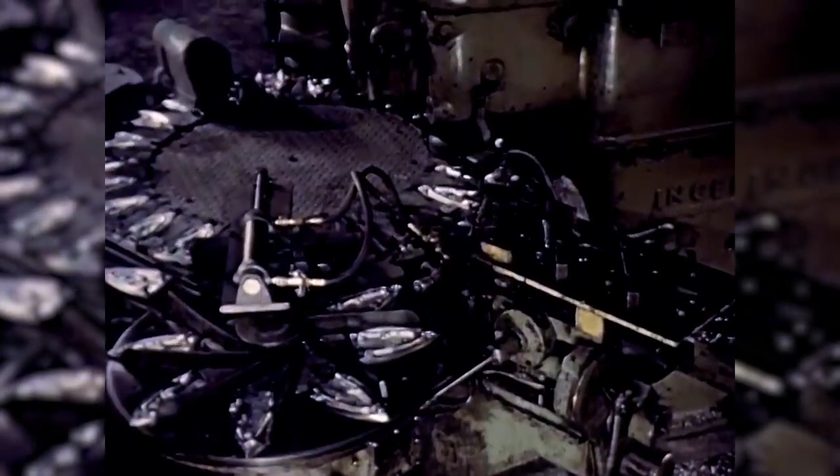This is automation, today's way of manufacturing. This is the challenge for today: to meet competition and rising costs by moving step by step towards automation.

Continuous automatic production, including automatic handling, automatic making, automatic inspecting, automatic assembling, automatic testing, automatic packaging of products in one continuous flow. The evolutionary step-by-step development is well underway today.

Before the word automation was coined, the idea of fully automatic production suggested blue sky fantasy. Improvements in manufacturing seemed funny or fearful, depending on the viewpoint. And increased productivity, the source of higher wages and profits, was often overlooked. The trouble was that some people thought of automation as a sudden thing, a revolutionary idea.

But it isn't. It began nearly 200 years ago, when Oliver Evans put into operation an automatic grist mill. But Evans' basic problem was controlled power. He had to depend on water wheels and gravity. Before automation could become significant, some entirely new type of power would have to be developed, a power far more flexible than falling water, or even steam.

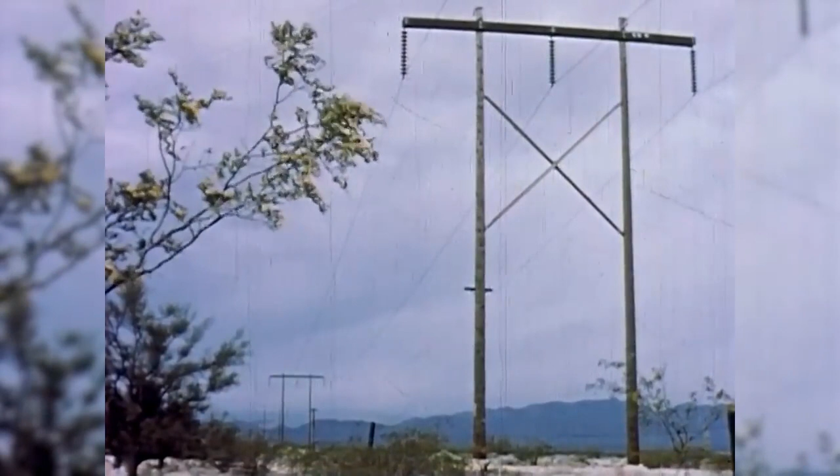Controllable electric power, which could make automatic production practicable throughout industry, appeared in the 19th century. The step-by-step development of continuous automatic production was accelerated as early as 1919, when automatic blowing of electric lamp bulbs was begun at Pitney Glass Works in Cleveland.

In 1938, five automatic machines were connected with transfers to form a continuous production line for machining and polishing flat iron castings. The idea of continuous automatic production, of automation, was here progressing from the processing of flowable materials like grain and molten glass to separate items like flat irons.

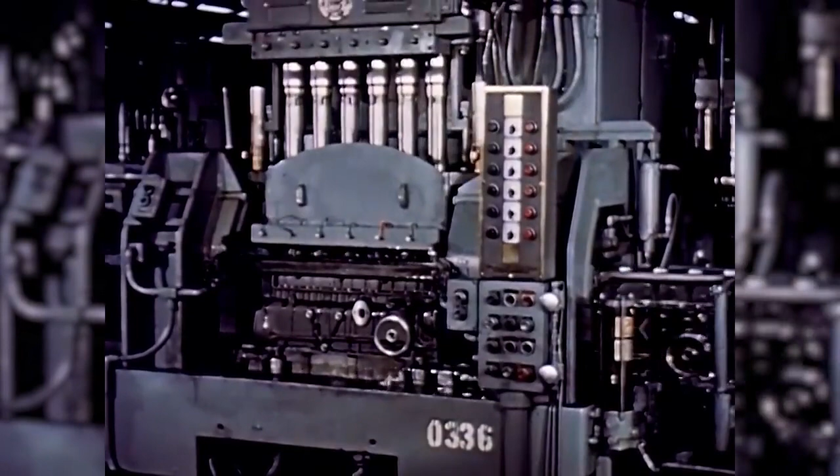And then, in the late 40s, developments in electric power and control helped to make possible a line for the automatic machining, honing, drilling, and boring of automobile engine blocks. This greatly increased productivity worked to the advantage of everyone, for this company today employs many more thousands of people than it did in 1947.

This natural evolution in industry is developing automation as a way of manufacturing that can do much to improve our factories, products, and profits, and upgrade our workforce today and in the years just ahead.

Progress in automation comes at a time when we will need it most. The United States, once an essentially agricultural country, has become the world's most important plant for the production of goods, with plenty of room left for food and fiber crops.

Each person works for the other. All consume each other's goods and products. Our numbers are growing fast, but our demand for goods is growing much faster. At the same time, business is getting more and more competitive, for if demand is growing, so is supply, as new competitors appear or old ones increase their efficiency.

To hold or to build our share of the available market, we must cut production costs by applying the principles of automation.

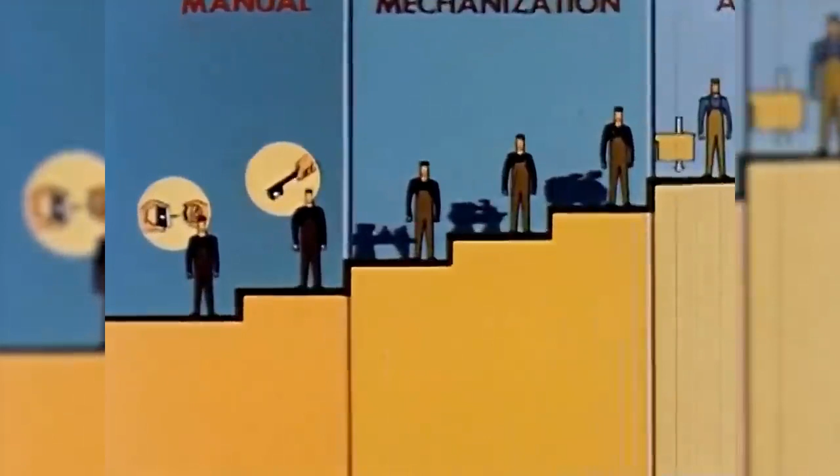Manufacturing operations can be separated into three broad groups. First is the manual area, where physical effort is used to perform operations by hand or with the aid of hand tools. Second is the mechanization area, where manually operated, power-driven machines with varying degrees of control are used to perform one or more operations.

Third is the area of continuous automatic production, where automatic machines are integrated with transfer devices and with controls to perform a series of continuous automatic operations.

Materials handling begins in the manual area as a separate operation. In the next area, mechanization of materials handling is introduced. In the automation area, it is an integrated part of all operations.

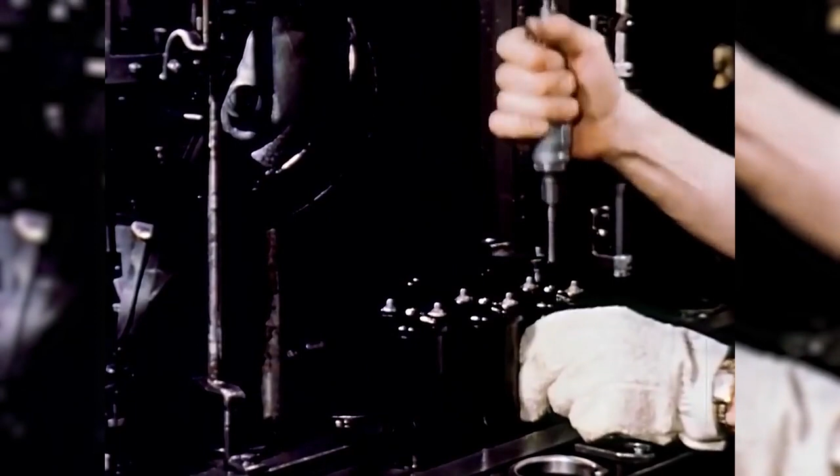How automatic can we get? Except for process industries like oil and chemicals, the highly automated factory is still far in the future for most manufacturers, and progress comes from finding operations that can be upgraded, if only one step at a time.

But the pressure of competition is bringing about step-by-step progress towards continuous automatic production, towards more and better jobs and greater profits. Automation principles, wherever they have been adopted, have proved their value in every way.

First, automation pays for itself within reasonable time. Automation increases efficiency. Machines can be kept running longer at full capacity without shutdowns and delays for loading and unloading.

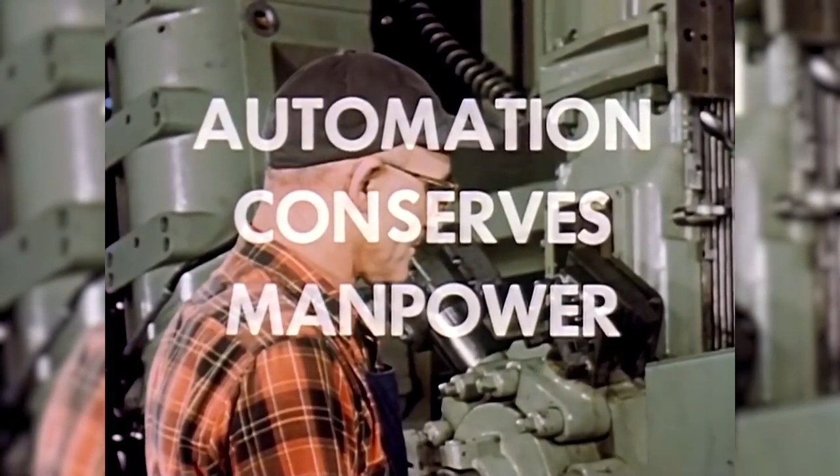Workers are upgraded. The emphasis shifts from manual to mental skills. Automation conserves manpower, a critical requirement as the demand for products grows far faster than the labor force.

Automation improves quality by reducing manual handling, and there is greater opportunity for building inspection into the process. Automation increases safety. Machines move and lift.

Human fatigue is greatly reduced. Automation reduces in-process inventories by the continual movement of materials.

While continuous automatic production has not been entirely achieved, some industries are close to it. Bulb production was once a batch operation, but as early as 1919, development toward continuous flow began.

In this glassworks, 46 types of bulbs are produced. Here is an operation high in the automation area.

Glass biscuits are automatically produced by pocketed rolls turning against flat rolls. Chain conveyors automatically pass the biscuits to the blowhead. Finish blowing takes place in this rotating two-part mold. Around they go by way of a merry-go-round conveyor, continuously, automatically, on their way to the annealing oven.

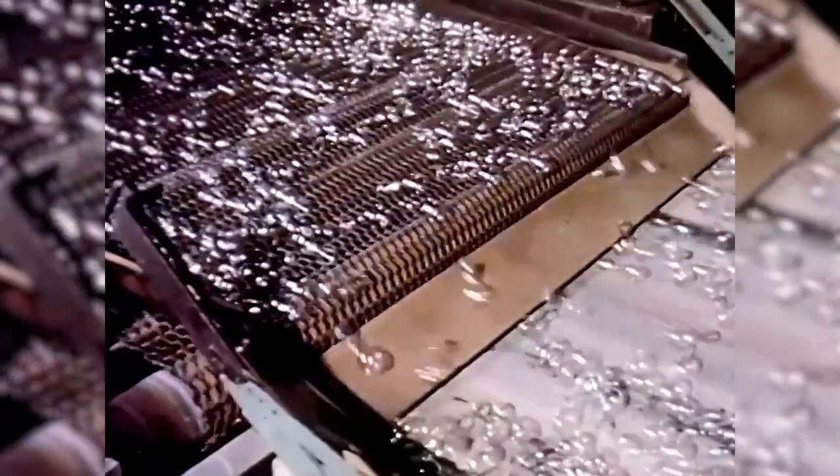The plant capacity through the use of such automation as we have seen is an unbelievable 1,100,000,000 bulbs a year on a 40-hour week basis.

Between 1910 and today, the cost of living index has risen 183%, but the cost of the 100-watt light bulb fell from $1.45 to less than a quarter.

If the production methods of 1910 were used today, this 100-watt light bulb would cost over $4.

During the same period, the population of the United States increased 80%, while employment in the lamp industry went up over 400%, or 5 times as fast.

Here is the product of an automation process that has very wide appeal indeed. Cookies of various types produced in a continuous flow operation. The coordination of equipment speeds in this process from dough to packing is provided by adjustable speed DC motor drives.

A cookie is more than something to eat. It is a manufacturing problem that has been licked. The customer is king, and highly flexible equipment is required to give him these varied delicacies.

This machine can be set for many different varieties, from rotary molded cookies to extruded stock, like fig bars, which are cut after they have left the oven.

Since all 4 types may be run in one day, the drives must change speed proportionately. Baking time can be changed, so the requirements for the next run can be met without upsetting relative adjustments on cooler, stacker, and packer for the remainder of the run.

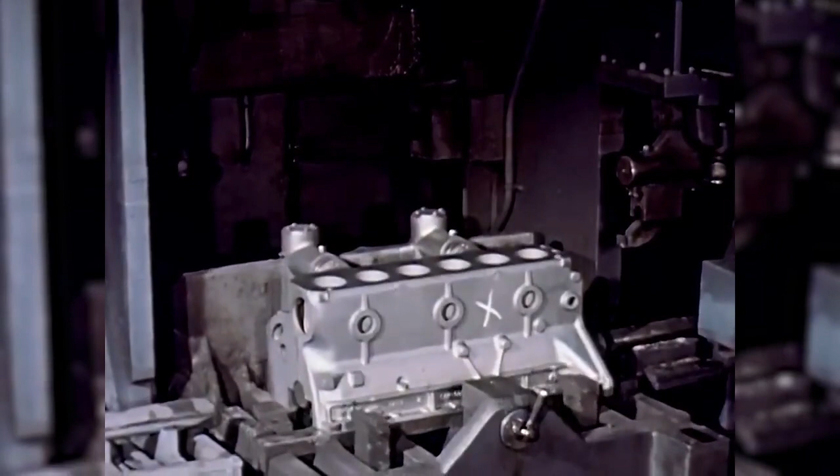Production levels are maintained by specialists who replace all worn tools. In this operation, electric drives and controls contribute to higher production rates at lower production costs.

These more elaborate examples of automation demonstrate to what extent the idea of continuous automatic production has been put into practice. It may not be economically feasible for every manufacturer to automate his entire production line, but important cost reductions can be realized by automating parts of a total operation.

Few people realize that for all operations, including making, inspecting, assembling, testing, and packaging, the average falls at the low end of the mechanization area.

This is the type of manual operation that can be seen in thousands of plants today.

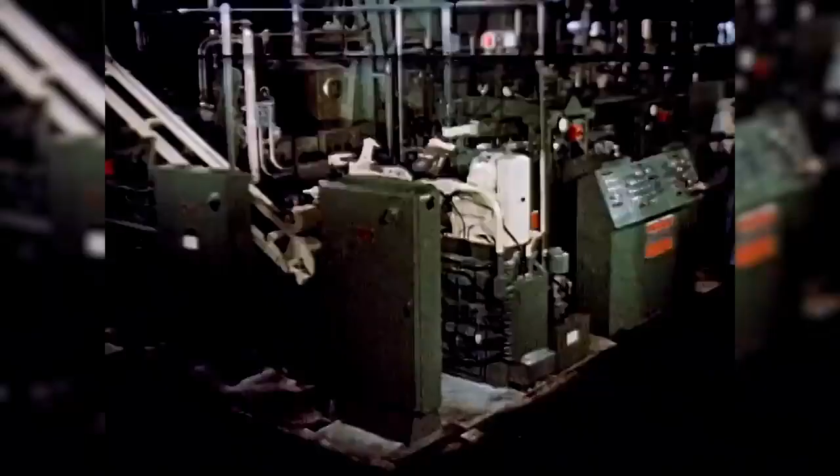The forgings shuttle down a chute into the first machine. From this point on, 22 different types of operations are automatically performed in a continuous cycle.

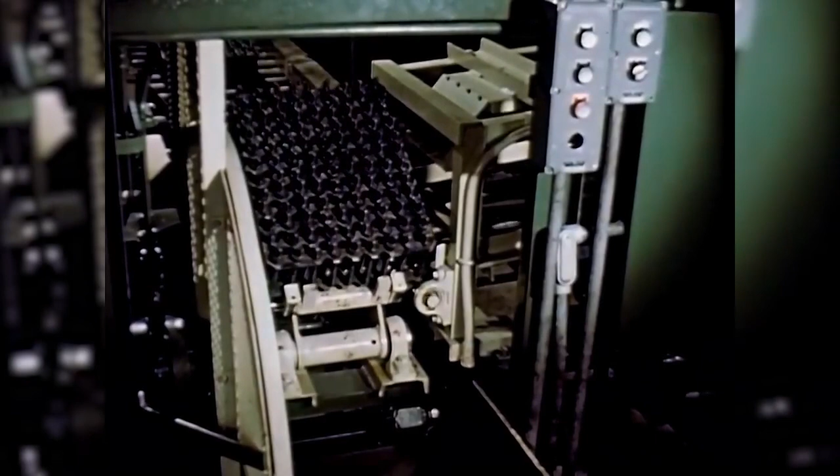Upon completion, the pallets are dumped and returned to the loading station. The crankshafts are then transferred to the final grinding operations, which will result in finished crankshafts like this.

There are numerous opportunities for moving inspection operations into the automation area. This manual inspection operation, once the very symbol of precision, is fast losing appeal as those who practice it lose money. Here is a machine for the automatic gauging and segregating of pistons.

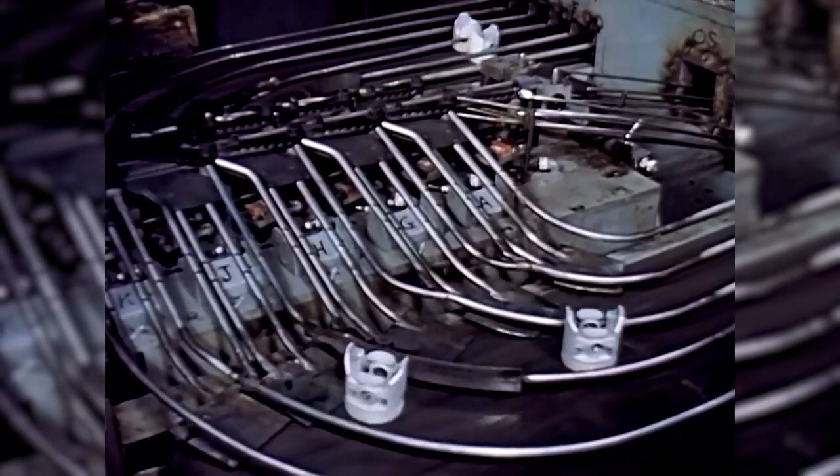The pistons enter and are gauged and stamped for pinhole size. Undersize and oversize parts are rejected down a chute. The second station gauges the piston for skirt diameter and taper, stamps it, and transfers it on a belt conveyor unit for segregating into classifications. Capacity of the machine is 1,700 parts per hour.

At times, automatic inspection may be combined with automatic making in one machine. This machine, equipped with automatic loading and unloading fixtures, continually measures its own work. When an error is sensed in the machining of a part, the tool is automatically repositioned to eliminate the error.

Assembly, even today, is an operation that falls almost entirely in the manual area. But cost-conscious manufacturers in all industries are alert to opportunities for savings through automation. In the assembly of condensers, for example, this winding machine has greatly increased production.

Significant progress has been further accomplished with this ingenious inline machine, on which 4 condenser parts, including cans, tubes, spring washers, and windings, are automatically assembled.

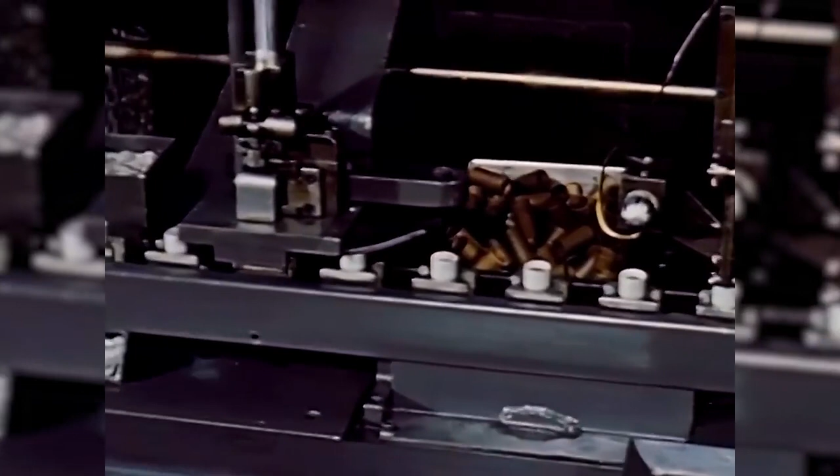In another inline operation combining further assembly and testing, each lead is gripped as the assembly passes, and the condenser is tested for capacity. If this test is unsatisfactory, the assembly is automatically rejected.

Brass clips are attached, as they are made, onto the lead wires. The clips are then automatically welded to the lead wires.

Here, great strides are being made toward the automatic assembly of electric motors. The motor parts are automatically conveyed from different areas of the factory to come together for assembly.

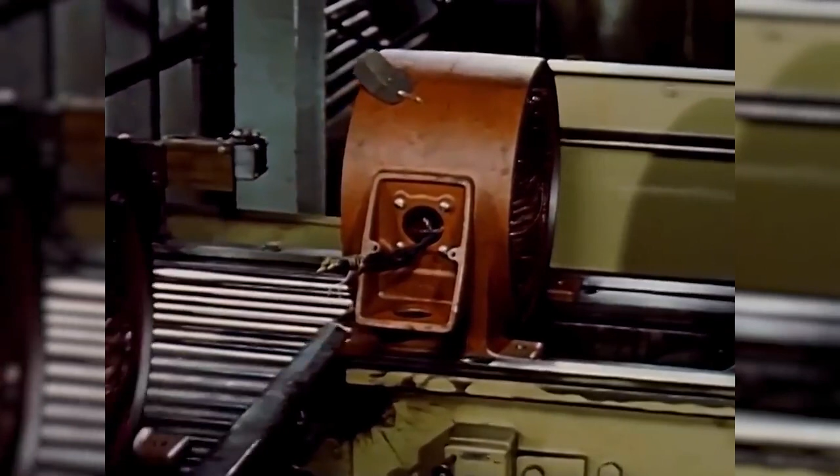The focal point is this assembly machine. The upgrading of the operation for automatic assembly here has helped to double motor production.

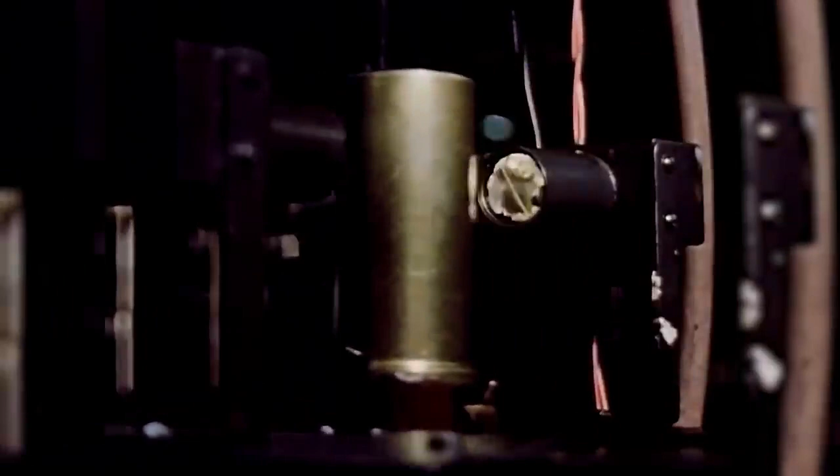The coils moving on the conveyor are checked for presence by a photoelectric cell and pass against sliding contacts for successive electrical tests. Sound signals notify the operator of defective coils, which he removes and places in a reject chute.

The testing of fluorescent starters has been accelerated by this automatic rotary machine. The starters, loaded manually into a rotating conveyor, are actuated by contacts traveling along a circular track.

The starter lights a fluorescent tube within a given period of time, and a photoelectric cell detecting the light allows the starter to be passed. An unlighted tube calls for rejection.

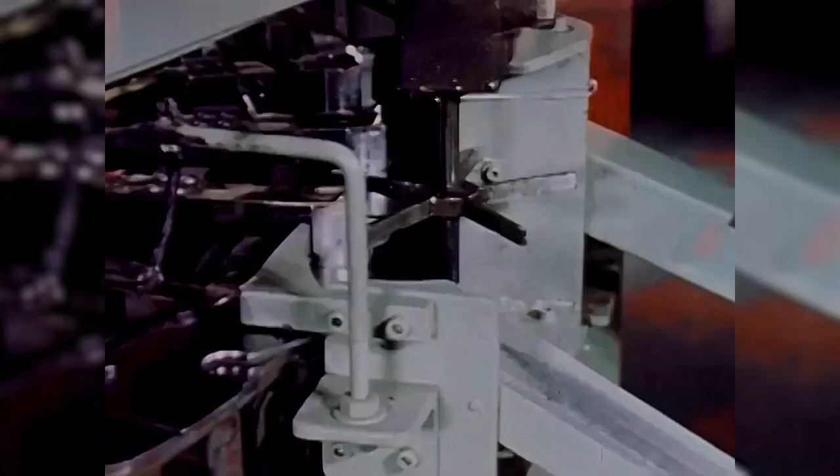Limit switches set and reset relays, permitting proper inspection of each succeeding starter.

In packaging, there are increasing opportunities to apply automation principles. Here, a group of machines automatically package nearly 13.5 million gallons of milk a year.

The carton flats are formed and glued and then ejected into a wax tank, from which they enter a cooling compartment to harden the wax.

The milk, already pasteurized and treated, is piped into this filling station, where carton after carton is filled with an exact amount. In this case, the capacity of the carton is 2 quarts.

Folding and stapling the cover is another automatic process, from which the cartons march endlessly to be placed in cases for delivery.

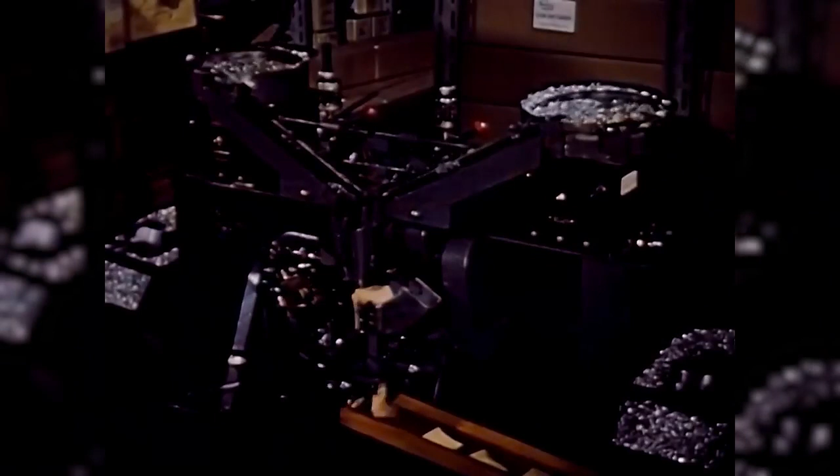The tiresome and relatively expensive work of filling packets with small items like screws or bolts has been eliminated by this packeting machine, which can turn out 24,000 packets per day.

Small screws, bolts, nails, or parts are fed from the bowl vibrators, which can automatically start or stop the flow of items, affording exact control of the number of pieces in each packet.

The double unit can pack 2 different items at once, ranging from 1/2 inch to 1 1/4 inches in length.

Making, inspecting, assembling, testing, packaging. The small manufacturer may not be able to automate every stage of production, but there are numerous opportunities to upgrade one or more individual operations.

The volume and nature of the product largely determine whether automation is feasible. Product design, standardization, materials and processes are the critical elements.

Where a complete redesigning job is possible, the problem of automatic production can be simplified. In the conventional chair, there are a variety of styles. This chair is made from shaped pieces, in many cases with the aid of hand tools, and finally assembled by hand.

Here is a chair of modern design, which is the product of more mechanization. The parts are machine formed. They still require some hand finishing and hand assembly.

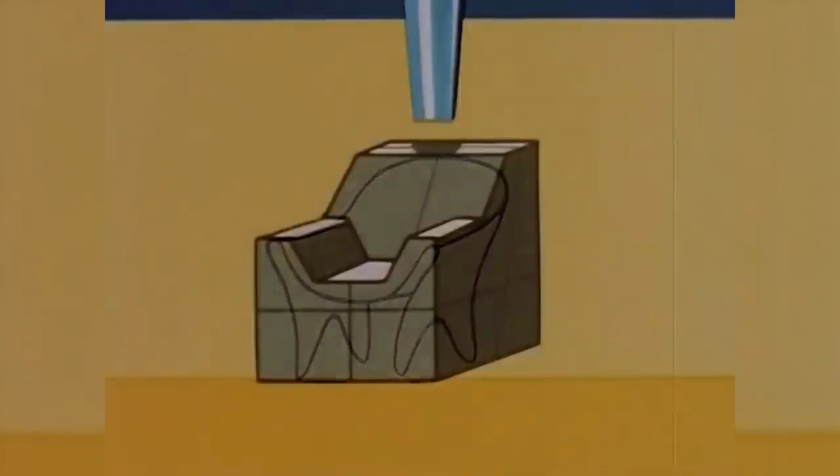A fresh approach to chair design is taken. The hand operations are designed out, and the material is molded with integral color and a perfect surface.

The higher we progress up the steps to automation, the more the product must be designed for continuous automatic production. Of course, there are always exceptions, and customer preference sometimes calls the turn.

For example, customers would not go for machine-cut pretzels. Traditionally, pretzels were hand-tied, and some experts said it was impossible to develop a machine to do the same job. But a way has been found to accomplish the impossible.

With pretzel tying machines, which can produce 50 hand-tied pretzels a minute, a battery of 16 of these pretzel tiers can turn out up to 384,000 of the twisted delicacies in an 8-hour day.

Of course, pretzels are standardized and produced in great volume. Standardization for volume production is one of the key factors in automation. With standardization, volume production, if it cannot be applied to the product itself, may be applied to the parts.

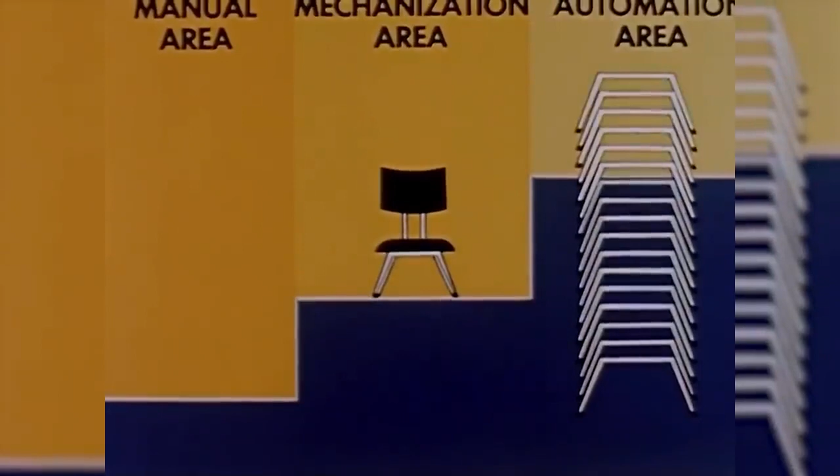The four legs of the mechanization-area chair might be produced automatically. In low production items such as large motors, the production of the laminations may be automated. In the jet engine, the number of turbine blades is high, and here again volume offers the possibility of automatic production a step below the product level.

There is a place for automation in every industry, large or small. The extent to which it can be applied economically is determined not by the size of the business, but by the volume and nature of the product.

In any operation, electricity is the essential ingredient of automation. As manufacturing operations are upgraded through the mechanization area and into the automation area, the vital importance of flexible electrical equipment grows. Equipment like control panels, limit switches, adjustable speed drives. These and many other standardized electrical units available today contribute to automation.

More specialized equipment is available where it is needed to automate extremely difficult operations, such as turning and facing cuts on irregularly shaped jet engine parts. The machine is a vertical turret lathe equipped with two-dimension tracer control.

A signal is generated in the magnetic tracing head by the displacement of a stylus against a template. Sensitive electrical equipment takes the low-power signal from the electronic panel and amplifies it to the power level necessary to operate the feed motors.

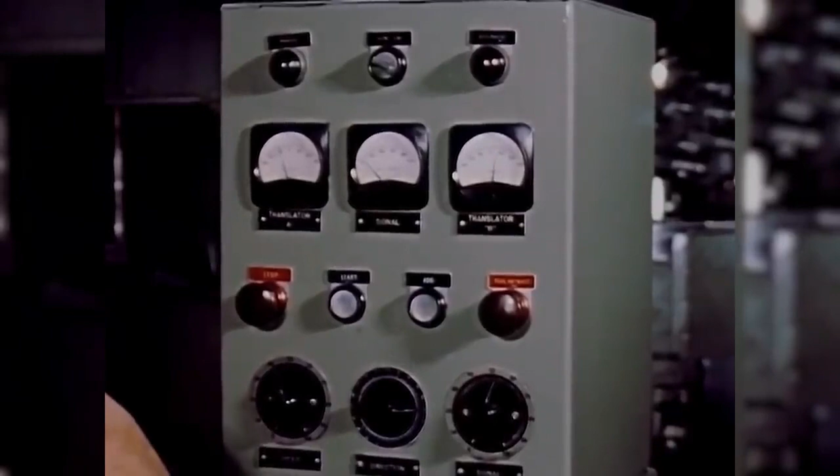In this case, automatic control is a necessity, since the cost of manufacturing such parts without tracer control on the machine would be prohibitive.

Another type of control is that made possible by record playback. Here is a mill designed for the machining of integrally stiffened airplane wing skins. The use of record playback control in this operation is expected to double production.

After a part has been produced using a combination of manual and electric control, the action is recorded in the form of signals from sensors onto magnetic tape. The tape is then played back for automatically producing successive parts. The tape programs the machine's operations.

Still another type of control reads punched cards and automatically positions all motions on such machines as this turret press, which cuts production time in half.

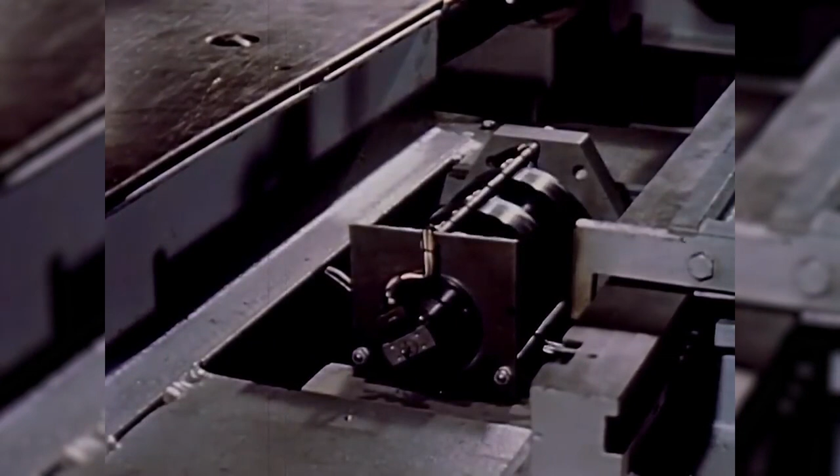Sensing position with sensors, the control detects and interprets punched card information for the direct current motors which drive each motion.

Combinations of electrical controls and drives like these now in use, as well as a great many others, can raise many of your operations to the level of continuous automatic production.

Progress towards automation is most often a step-by-step procedure. Much standard equipment in use today can be adapted for automatic production.

Transfer equipment can be added, as with this punch press. And many new machines can be purchased equipped with transfers, or designed for their addition, like this machine. There are also machines designed for special applications, but which often include a number of standardized units. There are many other types of machines which can be adapted to this way of manufacturing.

Automation, continuous automatic production, is a program for today. For it is today that the average of all manufacturing operations—making, inspecting, assembling, testing, packaging—falls in the low mechanization area.

And too often, grunt and sweat methods like this account for as much as 50% of production costs.

In some cases, practically an entire production process may be automated. But for the most part, the challenge of today is for management and engineers, men with vision, enthusiasm, and imagination, to tackle the job at hand and improve their operations step by step.

Any of these steps is possible, and possible now. Anyone who makes anything can find opportunities to apply the principles of automation to his business. And as we respond to the challenge, the electrical manufacturer and the machinery builder stand ready with the equipment and the engineering skill to help your business meet the competitive challenge of today.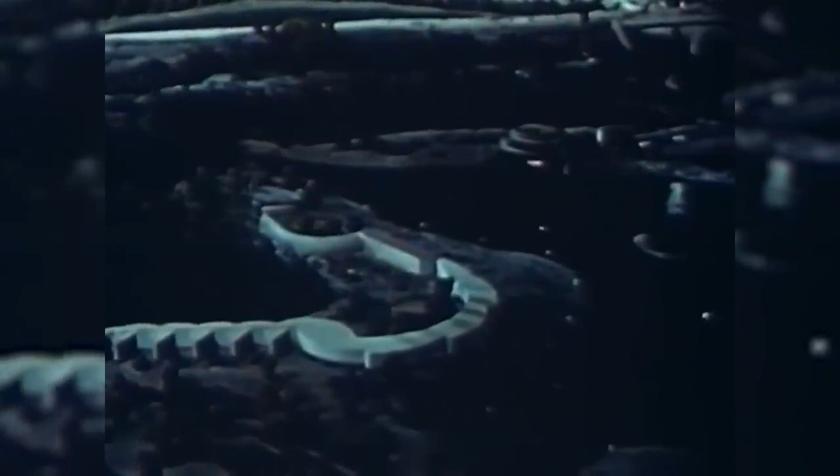What's this just ahead? An amusement park, 1960. Man's progress has brought more leisure for amusement and recreation, bringing them within easier reach of more people.

Industrial communities have gone ahead by multiplying the conveniences and comforts of living. Hundreds of comfortable homes for workers. All people benefited by broadening their scope of living, gaining by advanced means of communication and new methods of work.

Here is a thriving and prosperous steel town. Notice the furnaces glowing, river and rolling mills.

In the foreground is a model airport, an efficient combination of motor, air, and rail transportation in the world of tomorrow.

And now we see an enlarged section of 1960's express motorway. Along the ledge of this beautiful precipice, traffic moves at unreduced rates of speed. Safe distance between cars is maintained by automatic radio control. Curved sides assist the driver in keeping his car within the proper lane under all circumstances.

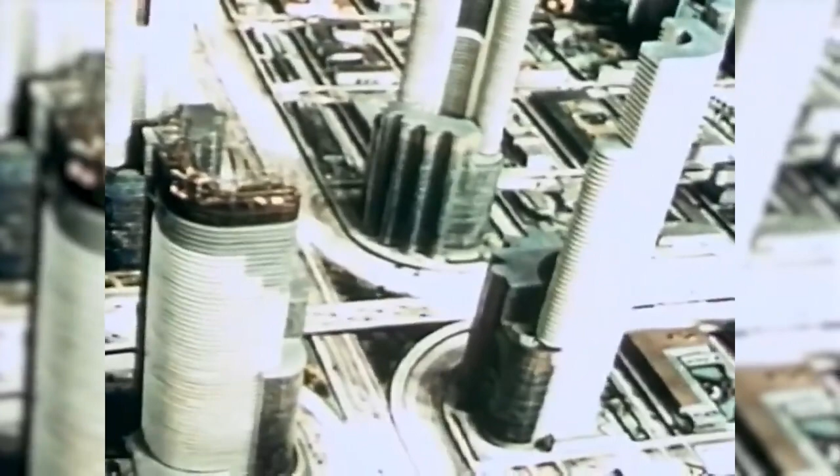A quarter mile high skyscraper tower with convenient rest and recreational facilities for all. On many of the buildings are landing decks for helicopters and autogyros.

Rich in sunshine is the city of 1960. Fresh air, fine green parkways, recreational and civic centers. Modern and efficient city planning, breathtaking architecture, each city block a complete unit in itself.

Here is an important intersection in the great metropolis of 1960. Elevated sidewalks give a new measure of safety and convenience to pedestrians. They actually double the available width for traffic in the street.

And so, we see some suggestion of the things to come. A world which, far from being finished, is hardly yet begun. A world with a future in which all of us are tremendously interested, because that is where we are going to spend the rest of our lives. In a future which can be whatever we propose to make it.

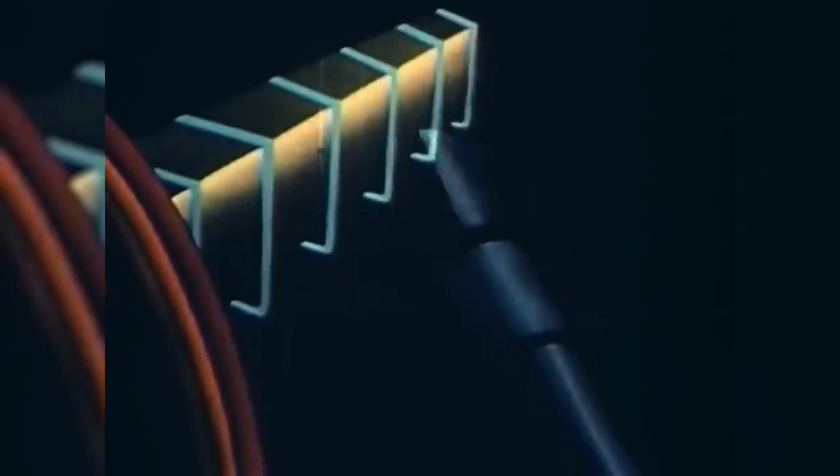As we go on, determined to unfold the constantly greater possibilities of the world of tomorrow. As we move more and more rapidly forward, penetrating new horizons in the spirit of individual enterprise, in the great American way.

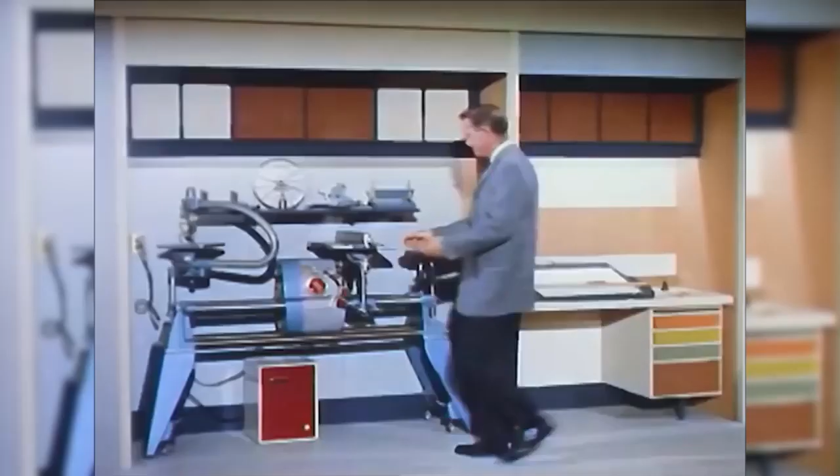Compactly stored behind sliding walls, and protected by an electric dehumidifier, which also helps keep the workshop dry. There's even a smaller version of the workshop for the kids, designed primarily as a model building workshop, child-sized to help encourage the fun of building and creating.

To complete the home workshop, there's even a paint spray booth. Equipped as he is with the latest in power tools and equipment, there's no job that's too big for Dad to tackle. Of course, Total Electric Living moves outdoors to the patio easily and conveniently.

Here's a new idea: a portable power pole that sets into pre-wired locations and lets you use your television or any of your appliances outdoors.

If there are insects, the touch of a button provides screened-in comfort. The screens are in place at night, out of the way during daylight hours. There are even wind screens that move at the touch of a button to give protection from wandering breezes.

Eating outdoors is better than ever, too, in the Total Electric home. Here's a food and service bar that can be assembled in many different ways. And because it's topped with Westinghouse Micarta, it is stain and beverage resistant, and can be cleaned up with a simple wipe of a damp cloth.

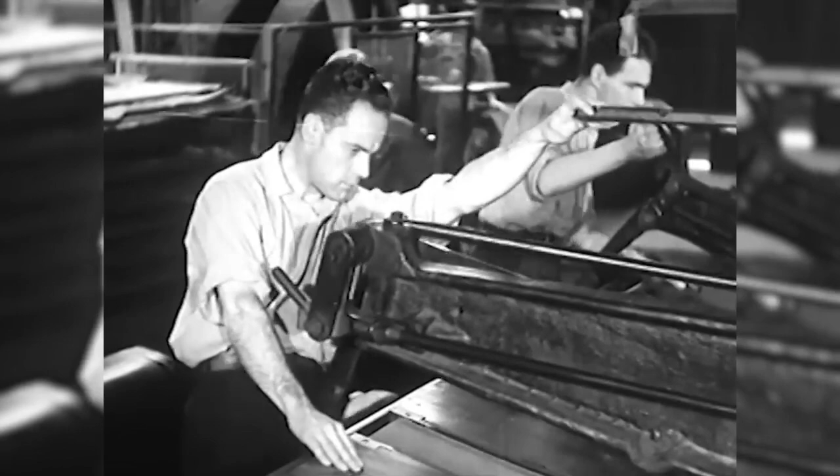I'm as much concerned over laying the men off as you are, Barnes. But I don't see how we can avoid it. I hate to break the news. Some of these men have been with us for 10 years and more. It's going to be awfully hard on them and their families. But this decision wasn't reached overnight. The board's been discussing it for months. We have finally decided to put in the new labor-saving machinery. Costs will be lower and production greater.

That will be good news for the stockholders if it works. But there still remains the question of the men. By the way, how many men are there in Department 5? 64. And I'm sorry to give you these instructions, Barnes, but the machinery will be ordered. It will be delivered next week. And that means? The men in number 5 will have to go. I'm sorry.

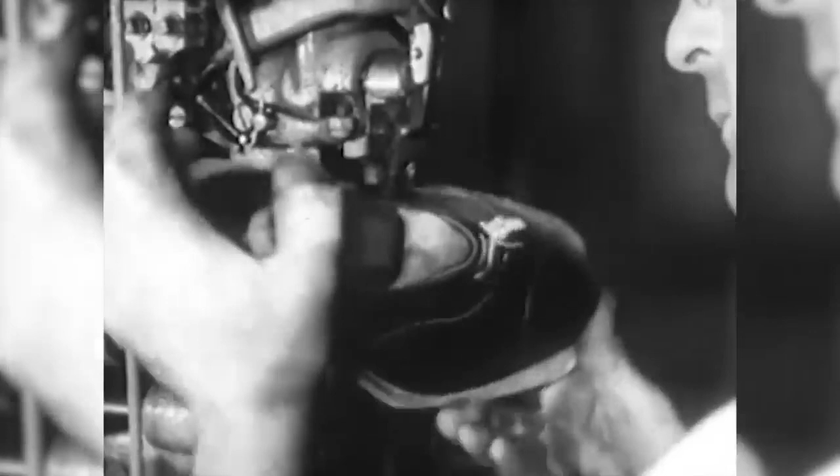Yes, machines come in and men go out. Everywhere the same story. These whirring wheels spinning faster, ever faster. A mighty crescendo of production. They typify a constantly changing industry, an industry that ever seeks to do its appointed work cheaper and quicker and better.

Sent for me, Mr. Palmer? Oh, yes, Colby. I'm glad you came. That will be all, Miss Warren. Something I want to show you.

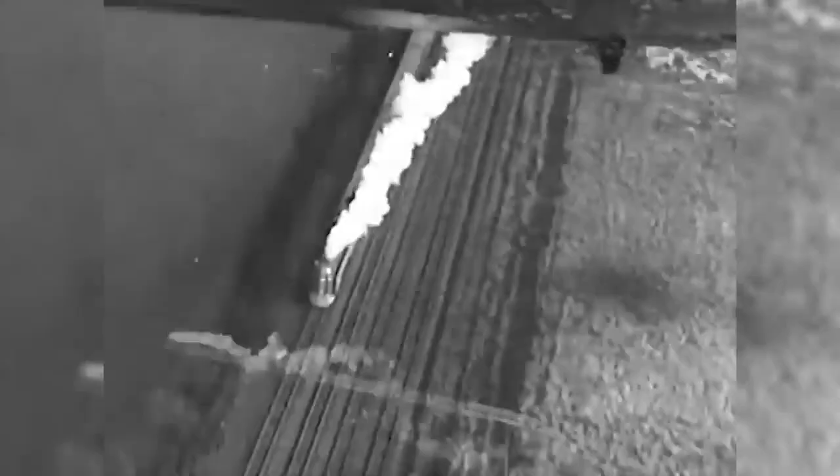How shall these conflicting factors be arranged to provide better living, more enjoyment of the good things of life, and abundance for all?

Find our problem at the crossroads. Broad highways leading in all directions. Which way shall we take?

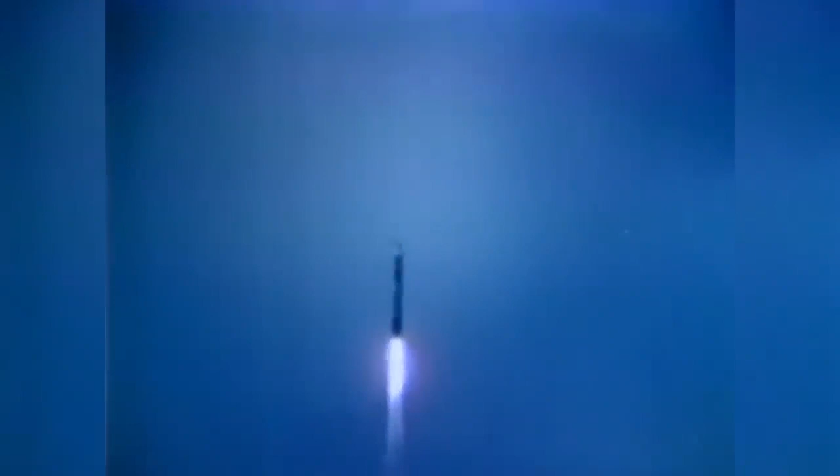Our birds must fly when they're required to. The high complexity of modern-day weapon systems demands the closest possible approach to absolute reliability. There is no second chance. So there must be absolute process control during system design and system manufacture.

Are these more imports from other lands? Or are they more exports of our own manufacture? If we are to compete successfully, both at home and abroad, our economy must expand, our industry modernize, to remain strong, to remain free, to enjoy the good life.

We also need newer and better aerospace vehicles, and we need them fast. We need newer and better weapons, and we need to get them from design concept into operation more quickly and at a reasonable cost. We need new and better products for civilian consumption, products which can compete with foreign goods here at home or in foreign markets.

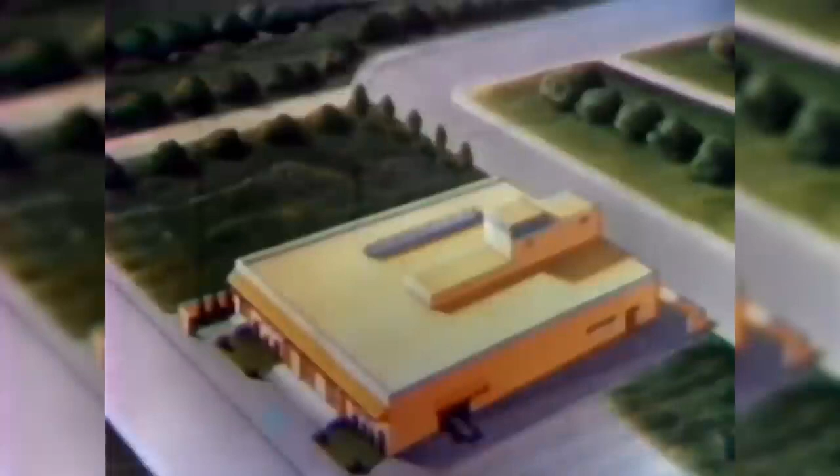And that component we were talking about is only one of many making up the complete product. How could you do all that so quickly? Not only so quickly, but in much less space. You'd need a much larger plant to do this by conventional methods. Oh, this is not conventional. Not at all. This is a modern plant. Really modern. What do you mean by that?

When you give your command over the mic, which may be in the plant or remote, almost anywhere, the information feeds into a voice converter, which translates your language into a language the computer can understand. The computer analyzes your request, then draws on its store of information to produce a series of tapes, which feed into a production control center. This center not only controls each of the machines, but the flow of parts as well, acting as a scheduling unit. Now all of the manufacturing units are actuated.

Basic shapes are routed to production centers for complete processing. Completed components are then checked automatically by inspection machines, then sent on to a robot subassembler. Subassemblies proceed on to a robot for final assembly, and then on to shipping. That's what I call command performance.

Of course, I've oversimplified the process a bit. You mean you've been putting me on, don't you? Not exactly. This is not as fantastic as you might think. Take the computer, for example.

Now these machines are in existence today. Inexpensive tape-controlled drill presses. The more sophisticated turret drill presses. Turret lathes, capable of high-accuracy contouring.

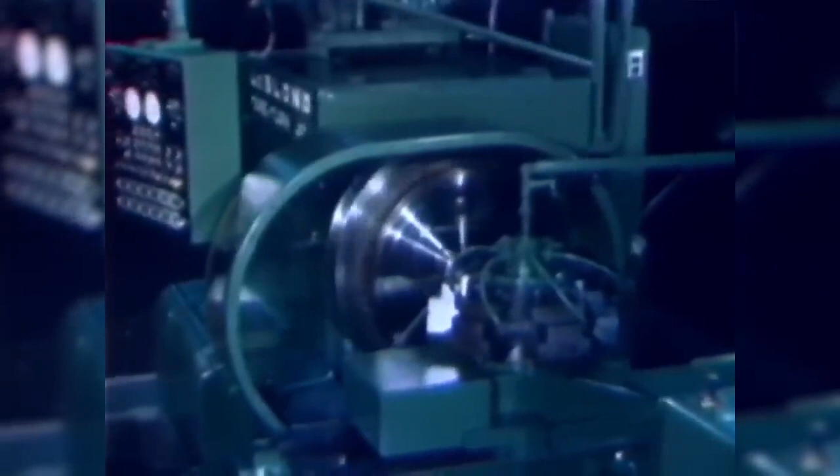Tape-controlled engine lathes, with equally exacting contouring and thread-cutting capabilities. High-precision multi-axis profiling mills. Machining centers that change tools, mill, drill, bore, ream, and tap.

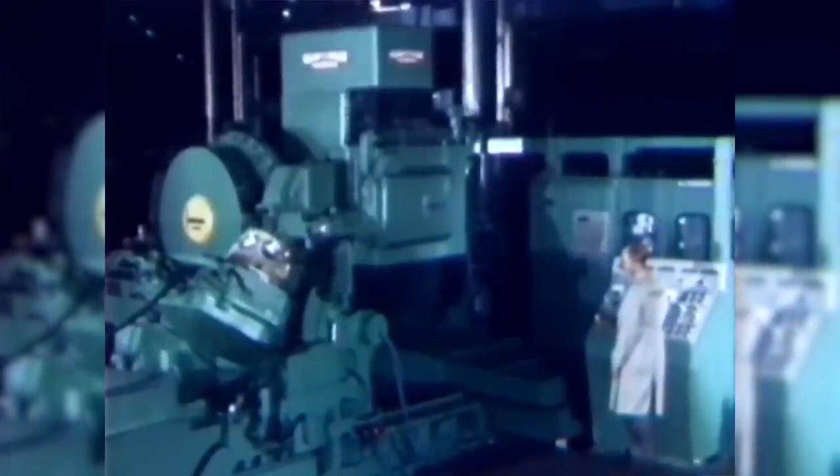In many cases, they can complete the entire manufacturing process in just one setup, fully capable of doing that job of yours we were talking about, and even more.

Now, what different tools would you need for this piece? 6 different milling cutters, 4 sizes of drills, 4 reamers, 6 taps, and 4 boring bars. And where you needed 8 machines to use these tools, the whole batch is loaded into a magazine for use by this one machine.

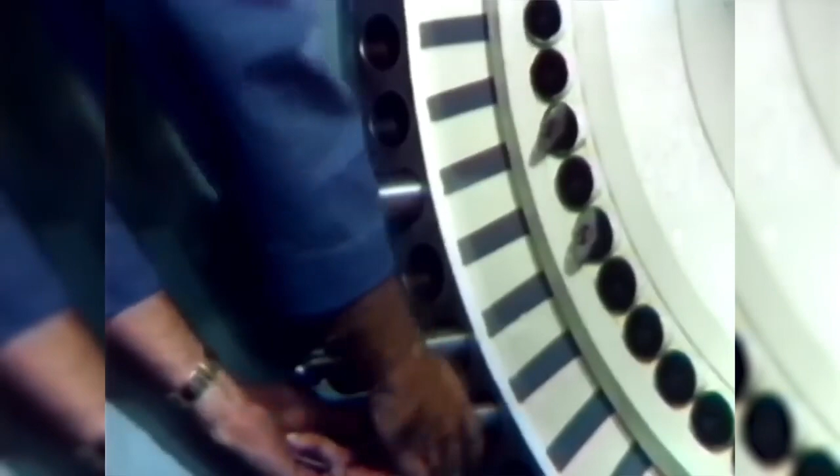All the instructions to the machine are on a punched tape. The intelligence on the tape tells the machine exactly what to do. This is called numerical control, which is one of the means of using mathematical definitions to furnish intelligence a machine can understand. There are many methods of accomplishing this. However it's done, it certainly shortens the chain of command and greatly reduces the opportunities for a breakdown in communications.

There's the same casting you would have started with in your conventional shop. But notice there's only clamps required. The machine itself will even make its fixtures from tape control if necessary.

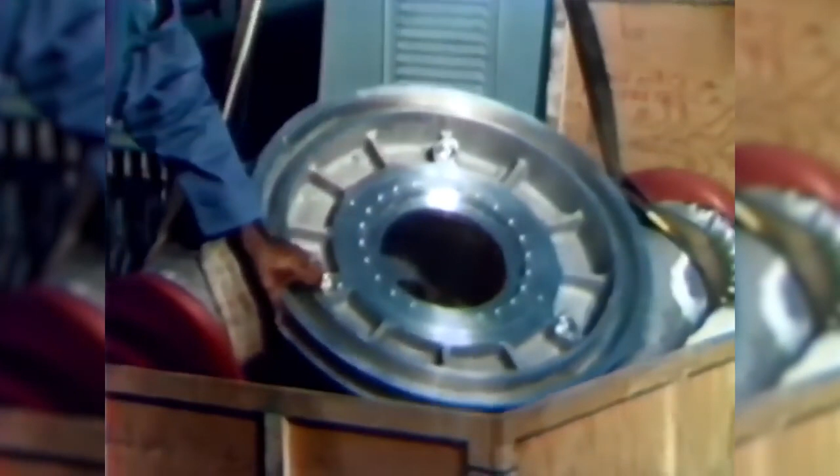And there you are. All the machining done in only 45 hours. How long would it have taken in your shop? Oh, about 300 hours to machine and 26 weeks of lead time, after you tooled up. Remember, the lead time here was only 2 weeks. If you need a second or third or fourth piece, you get them in a matter of hours, all exactly alike. Now that's performance.

What happened to automatic inspection you were dreaming about? That was no dream. They're already in existence too. And research and development are making them better all the time.

On this machine, a probe is guided by a tape similar to the one used in manufacturing the part. The measurements are recorded for inspection and record.

But you still need an original detailed drawing, don't you? Not necessarily. But if you want one, it can be made from a numerical control tape too, operating a drafting machine. Often the drawing can be made at the same time the part is being made, using instructions from the same tape.

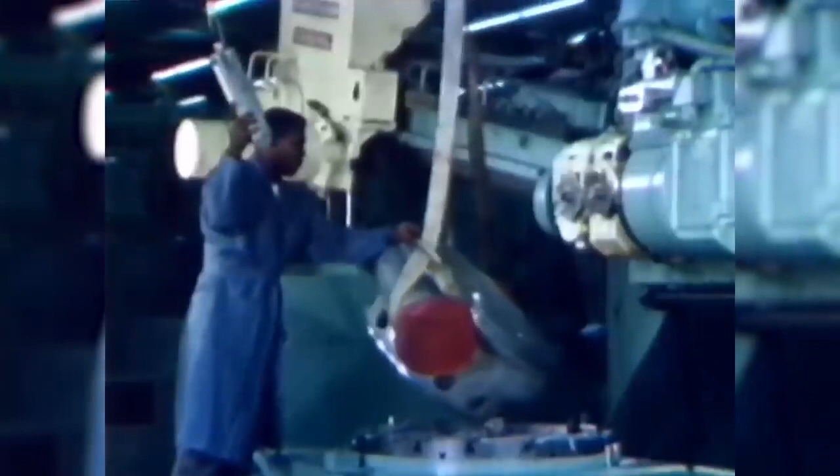I notice the loading and removal from the machine is still conventional. But it needn't be. You'll find automatic loaders and transfer mechanisms on a lot of production lines today.

This automatic material handler remembers every sheet in its inventory and will deliver it undamaged in seconds.

This robot manipulator will perform a variety of handling operations. It can be easily taught to load, unload, and assemble parts because of its electronic brain.

So you see, we have practically all the elements of our plan of the future. It's just a matter of time before someone puts them all together to make the dream a reality.

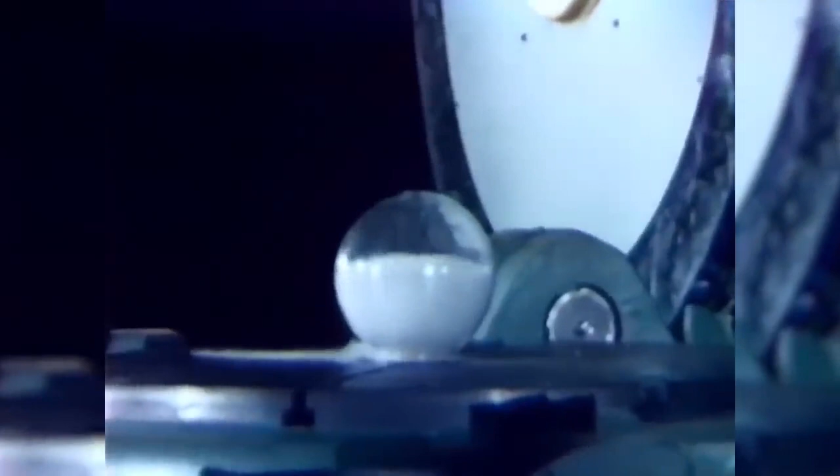I don't know that anyone has ever produced a crystal ball on one of these machines, but you don't need to be a fortune teller to realize that our success in aerospace depends upon our national capability to produce combat-ready systems with complete reliability. We must produce first, best, and at the lowest possible costs, which are consistent with reliability and reproducibility.

This means that we must be able to manufacture from all sorts of new and exotic materials. It means we must be able to produce structural members with a high degree of configuration complexity. It means we must produce with greater dimensional control.

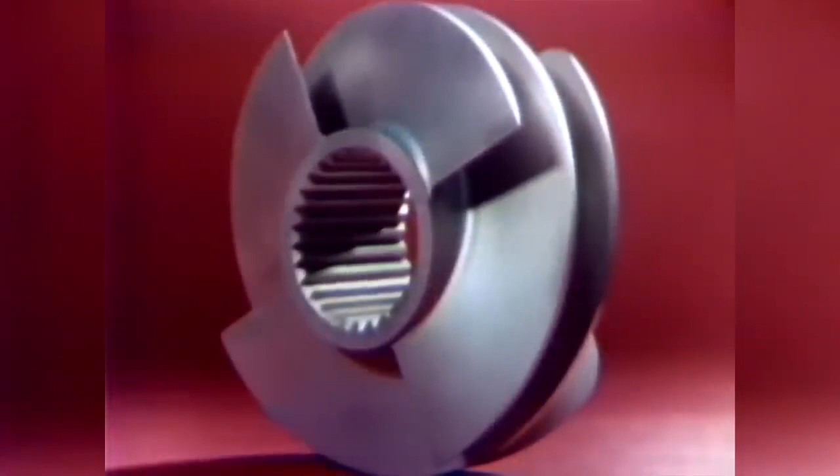Some large rocket engine inducers, for example, can't be produced to design concept by conventional manufacturing methods. It means that we must produce components which have structural integrity.

This aircraft bulkhead was built up of over 90 different parts, requiring more than 1,000 rivets and high-strength fasteners. You can imagine how long it took to tool, machine, and assemble all these parts, and you can imagine the possible human error involved.

The more modern one-piece bulkheads have greater structural integrity, but they were still expensive. These one-piece bulkheads were first produced by conventional methods, using specially designed tracer-controlled rotary tables with many coordinated overlay templates and tracer patterns. It took 160 hours of machining time to produce one bulkhead, and at considerable cost.

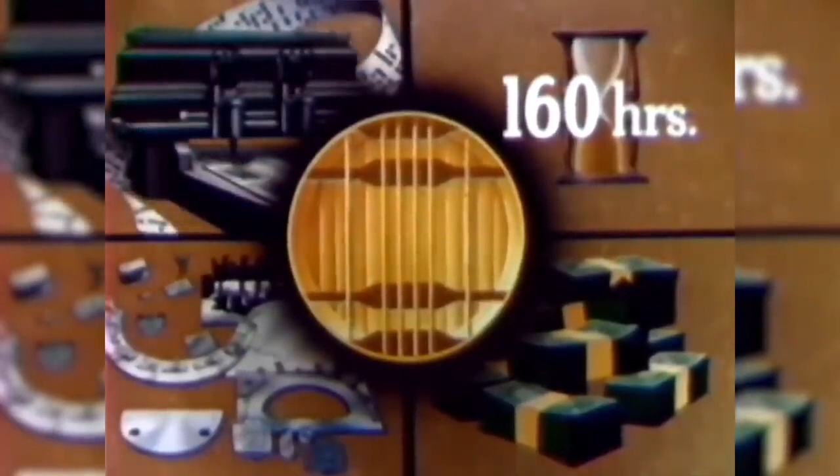The part is now programmed on a numerically controlled skin mill to machine 2 at a time. This requires only 2 sets of vacuum chucks and 9 reels of tape. The time reduced to only 9 hours per part, and the cost reduced by 80%. In addition, there's a 25% reduction in weight.

Command performance? I'll say. But you can best get it with numerically controlled machines.

Can this type of control be applied to other types of machines? Certainly. There are machines that automatically position and punch all types of panels.

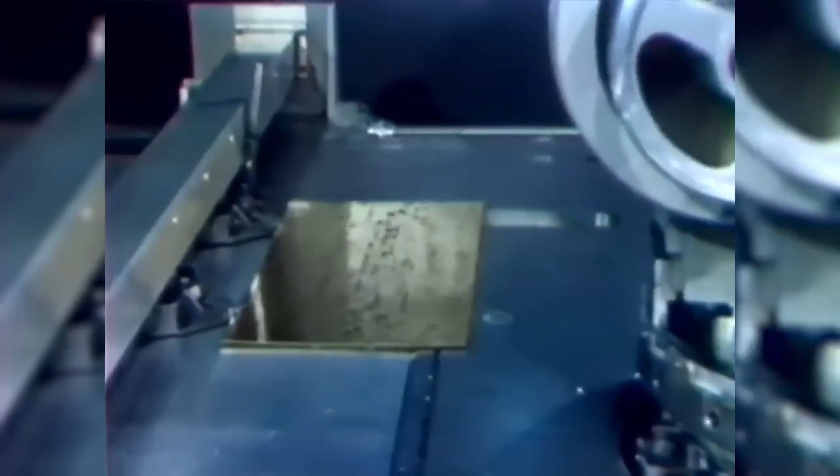Machines which build up rocket motor cases by the controlled winding of glass filament. Machines that position connector panels for wiring. Machines that position and mate the wiring connections on assembled electrical panels.

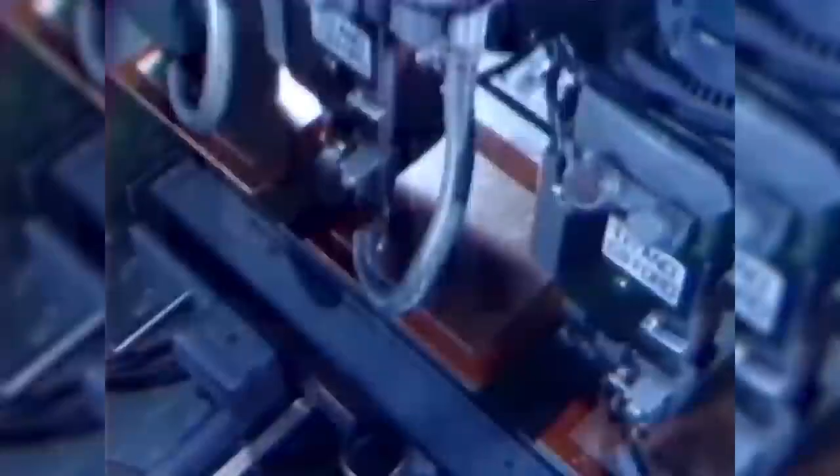Machines for drilling printed circuit boards. Machines for inserting the components in these boards.

Machines for spot welding, which saves 72% in labor costs. This machine has proved invaluable in spot welding fuselage sections.

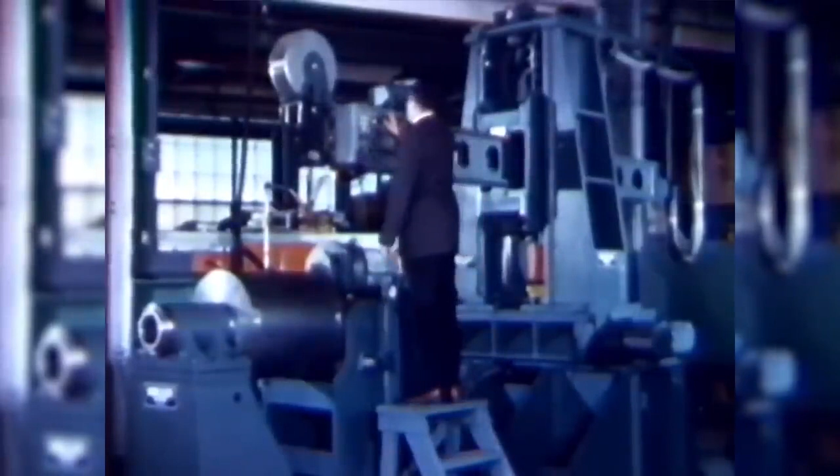The more complex fusion welding also can be performed by numerical control. The tape not only controls the positioning and movement of the arc, but also the welding factors: gas flow, current, and the like. In guiding the arc, the control permits blind welding down through one structural member to fuse it with a hidden member below. The result? A stronger weld, a member with more structural integrity, a more reliable weapon system.

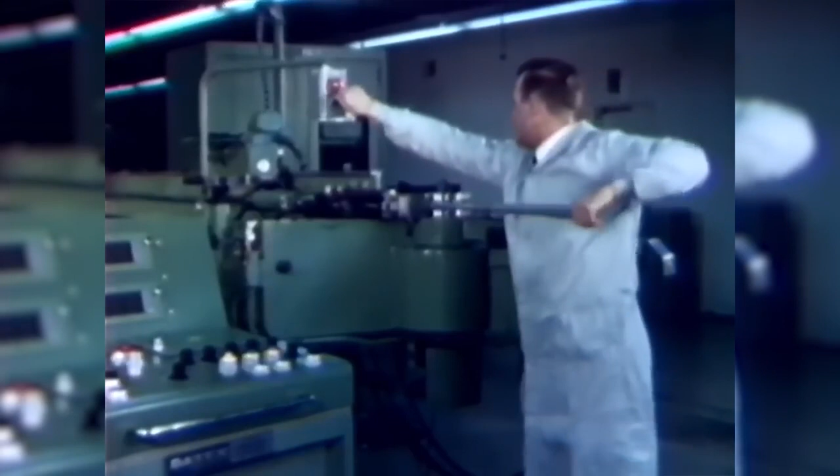Tubes can be bent by numerical control also. Tailpipes that fit any car precisely, or the miles of plumbing used in modern missiles, and all without the need for separate jigs and setup time.

By far the most versatile and flexible are the numerically controlled machines. For one-piece or production runs, they're the answer to involved machining operations. And for machining control, you can't beat instructions which are fixed and not subject to human error or emotion.

Why, this tape could be sent anywhere in the world to a similar numerically controlled machine, and it would produce a part interchangeable with the one produced here from this tape.

May we backtrack a moment? Surely. Just how do the instructions get to the machine in the first place? Well, let's begin with your own sketch of some part. Make it complicated, we'll hog it out of a block. Let's use master dimension. Okay.

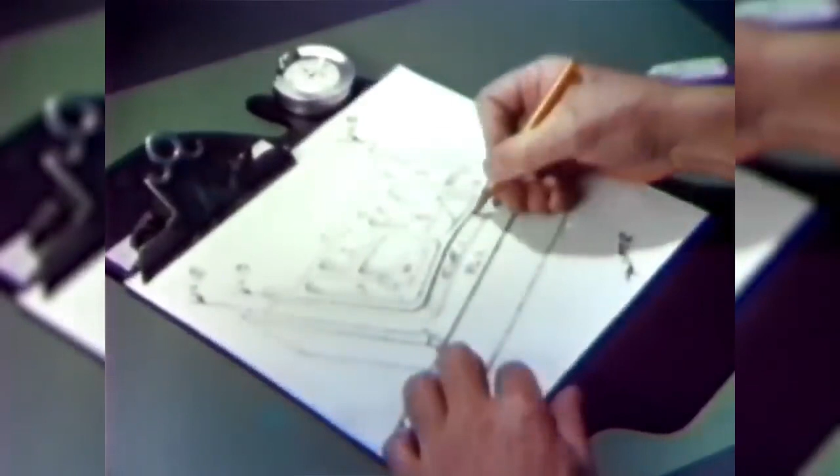There you are, with all the essential dimensions, but scarcely something a machinist could work from. That took you about an hour. Now, we'll take this to a programmer as the next step in tape preparation.

And there's the program. Now, let's see, that took about an hour and 45 minutes. Add that to the hour for the sketch, and the 5 minutes it took us to get here. And the total's 2 hours and 50 minutes.

Those words on there look sort of familiar, but different. That's right, they're a kind of pidgin English.

This information will command the tool to start from the point called set point, which is defined as the point with coordinates 1, 1, 1. With the tool on the right, it is instructed to go right along the line base.

At this point in the operation, the tool is sent forward to start cutting a previously defined circle about a previously defined point 2. Now here's that circle on the sketch. You can see it's a language that you can readily understand and use, and one the computer can understand too.

As of now, conventional computers do not accept oral commands, so the instructions are put on punched cards or tape.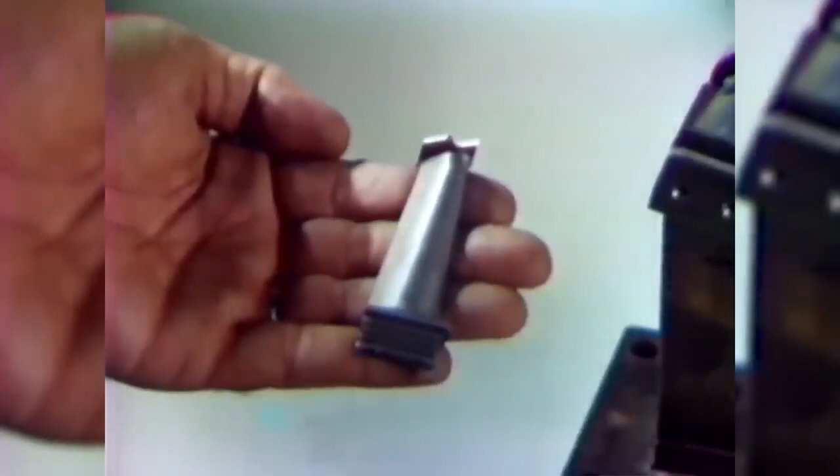This finished turbine bucket was shaped from high-temperature material, and here are the shaped electrodes that were used to do it. The process replaces a dozen conventional machines and produces a yearly savings of about 80%.

When subjected to enough pressure, metals become plastic and are easily formed. This vertical shear former produces turbine compressor shafts at a savings of $1,500 per part.

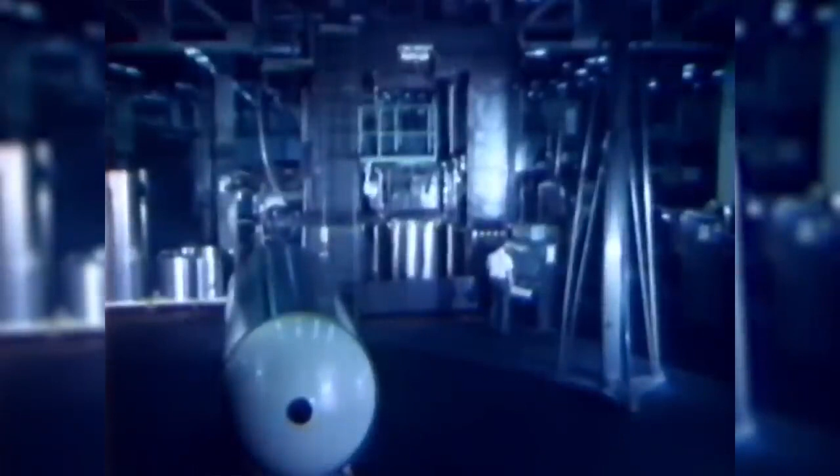Similar machines will turn out shapes such as cylinders, cones, and rocket motor cases from practically any metal, including many of the exotic alloys.

Or suppose your product needs formed parts, like this. This machine pre-stresses metal to its yield point and has a tension control system, so that forming is accomplished with high accuracy.

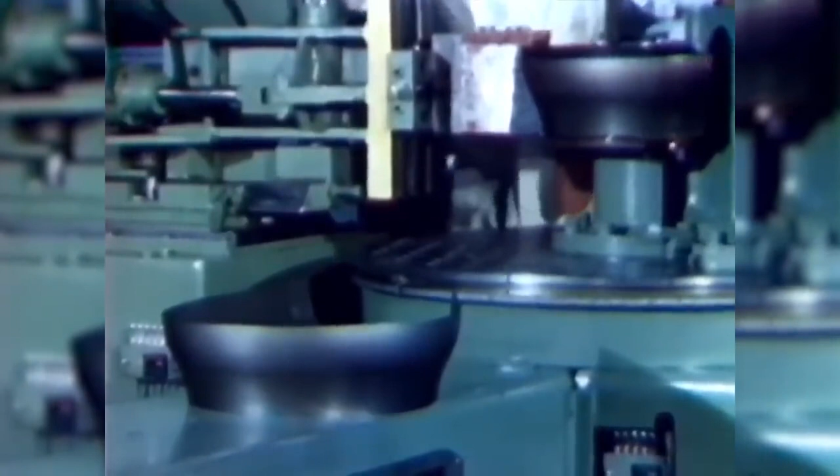This jet engine part was formed from Rene 41 in just 2 minutes, and the savings over conventional methods is 80%. A similar type of process will give you savings of up to 90% on drawn components like this, and permits the use of inexpensive dies.

This blank holder, adapted to a conventional press, pre-stresses the metal and makes it more flowable than plastic. By adjusting the stress, almost any metal can be formed using the same die.

Normally, 3 draws would be required to produce this part, with 270 hours of handwork for finishing. But here it is, produced in 1 stroke, holding its shape without springback and maintaining that shape throughout subsequent welding.

This hydroform turns out complex shaped parts in seconds that formerly took hours to fabricate, assemble, and weld. The rubber bladder reduces tooling to only 1 inexpensive die.

Want more savings in forming metals? Perhaps electromagnetic metal forming is the answer.

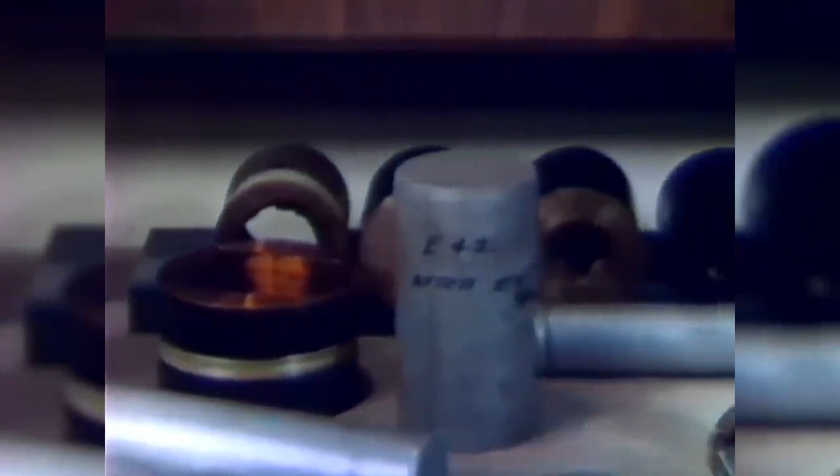This process uses powerful magnetic fields to swage, expand, compress, coin, shear, and assemble conductive metals without mechanical contact with the work. This machine uses the explosive power of man-made lightning to form parts.

What about forging? How about that? That's high energy rate forging.

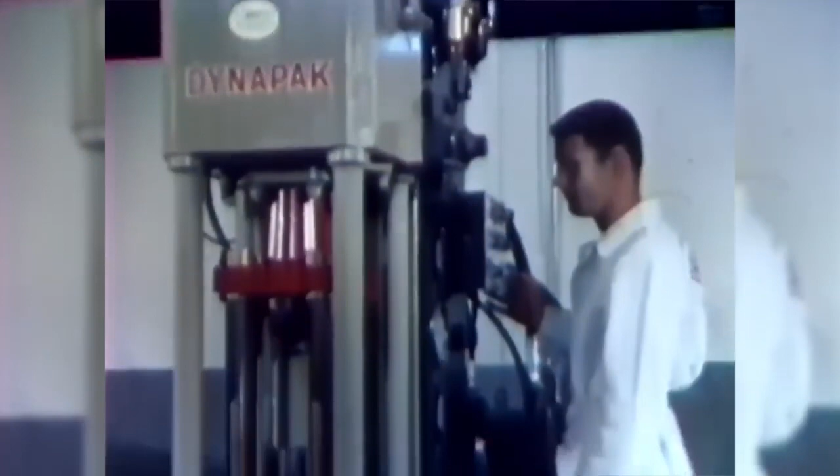These machines will deliver a terrific amount of energy in a split second to forge such materials as tungsten or even cast iron, as well as the usual materials.

High-tonnage mechanical presses also offer great savings in the production of precision forgings.

For testing electronic systems, there's automatic testing equipment. Here's a complete checkout of a wiring harness. This machine checks missiles, computers, servo systems, and the like.

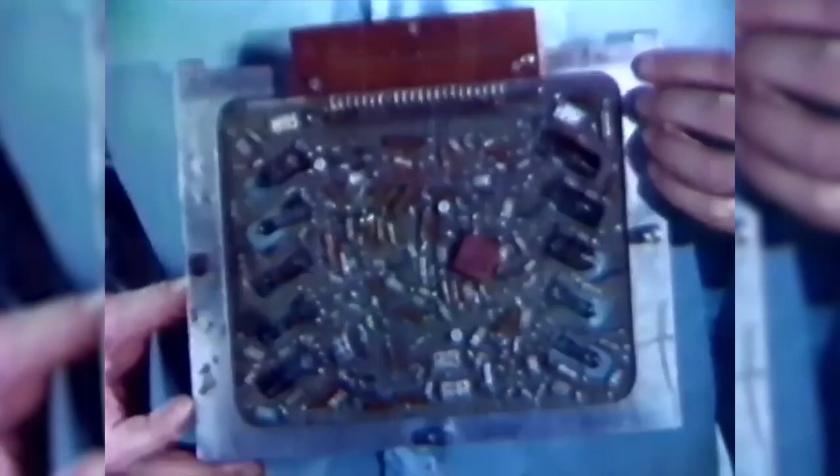Results of the tests can be recorded on a printed readout. And the savings? Well, in addition to the time, this piece of equipment replaces 150 separate pieces of test equipment required on many of the complicated checkouts.

Imagine what all these methods of modern manufacturing are going to do for the designers. And of course, you've seen only a few of the many new methods available today.

No need for them to be limited by the restrictions of conventional manufacturing. They can now design a part to do the best job without compromise with manufacturing limitations.

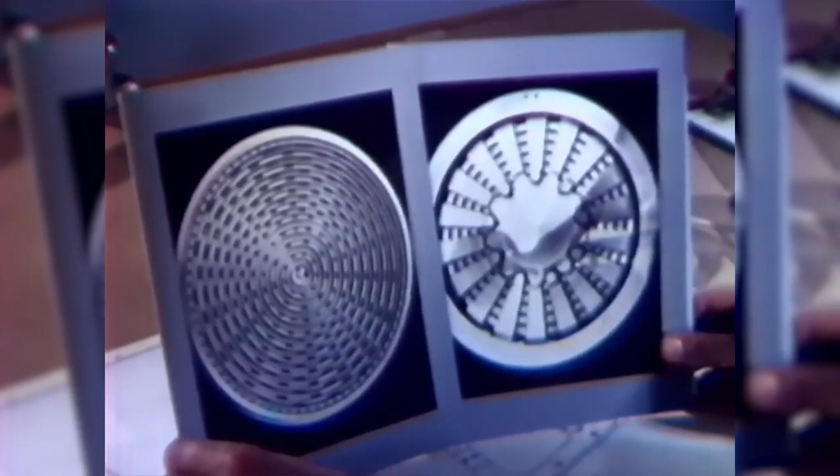I doubt if there's a machinist in the world who could have turned out this part and met the required specifications. Yet it's a vital part. And I know that without modern machining, it could never have been produced in time to get our missiles in operation on schedule. And believe me, we must be on schedule in these areas.

We must modernize our manufacturing methods, and go from design concept to finished product as quickly as possible. We must keep the wheels turning the best way we know how. We must apply what we know today and search for ever better methods.

This is a command performance for the survival of industry and our country.

Say, do you still have that clipboard? Sure, here it is. Why? I want to write myself a note, so I won't forget something. See? This is going to be a command performance, too.

Good idea. Because the Defense Department expects its contractors to maintain a modern base in their facilities. In keeping with the advance of aerospace technology, we need the productivity, reliability, and repeatability that only modern manufacturing can provide. And we all need the savings which can be effected in both time and money.